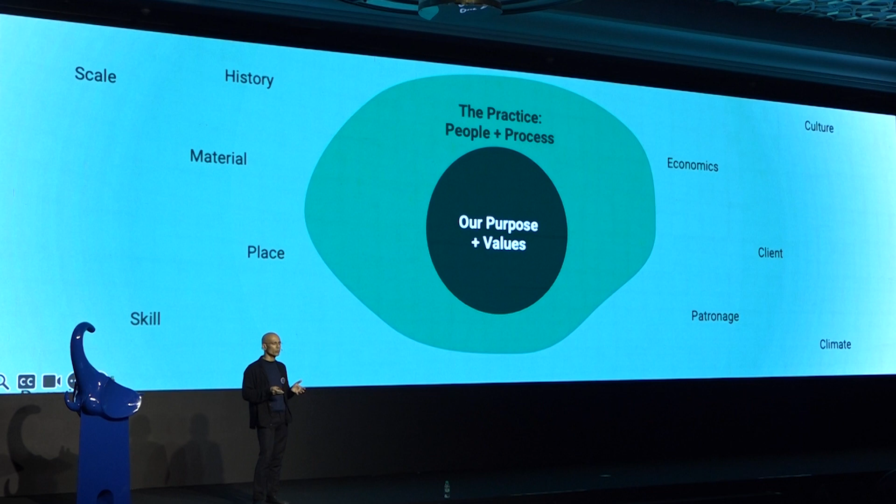But what I'd like to lean into today is the why and how of what we do. As our practice reshapes itself to changing external conditions, such as clients, budgets, and what have you, there is an underlying set of design values that we believe speaks to the changing needs of the vast diversity of India - guiding principles that address not only environmental concerns, but equally the sustainability of our social and cultural context.

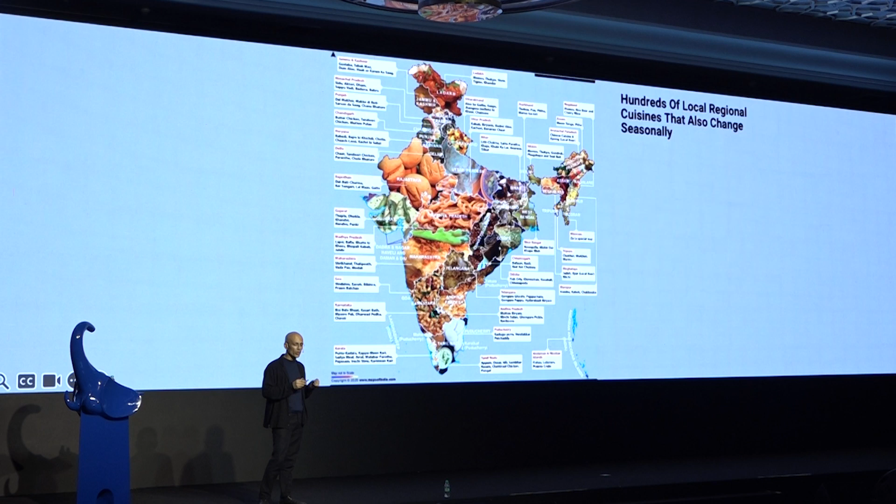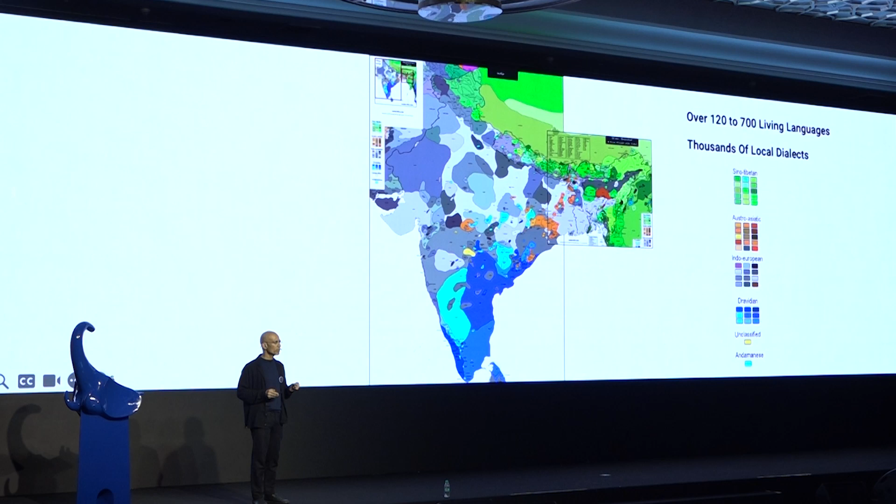Before I do that, I'd like to go a little deeper into understanding our country. We occupy only about 2.4% of the world's landmass and yet have more than half of the globe's climatic zones. What that means is we generate 21 agroecological regions within the country, which in turn creates amongst the most diverse regional cuisines in the world, based entirely on local and seasonal produce. We have over 2,000 documented craft forms still alive, even though a lot of them are rapidly dying. According to different sources, we have hundreds of living languages and thousands of dialects. In short, we are many countries in one.

But why is all this important? Our traditional lifestyles, a lot of which are still vibrant and alive, are based on strong regional response, where people live in harmony with their context - richly diverse cultures which are highly local, impacting language, food, clothing, and of course, building.

A few examples: such as this in Kerala on the southern coast, with its hot and humid climate, where people's clothing is as porous and ventilated as the buildings they inhabit. The food they eat promotes cooling in the body, and most of the population still lives comfortably without any air conditioning.

Or then here in the Himalayan desert of Ladakh, with its cold and dry climate, where the high thermal mass of the mud walls and small windows and the yak wool and fur clothing keeps people warm with very little artificial heating, while the salt butter tea keeps the skin supple and hydrated.

Or then the western hot and dry deserts of Kutch and Rajasthan, where straw bale roofs and adobe walls of the buildings, and layers of white hand-spun cotton on people, keeps the coolth in and the heat out, as the spicy food keeps the sweat glands active.

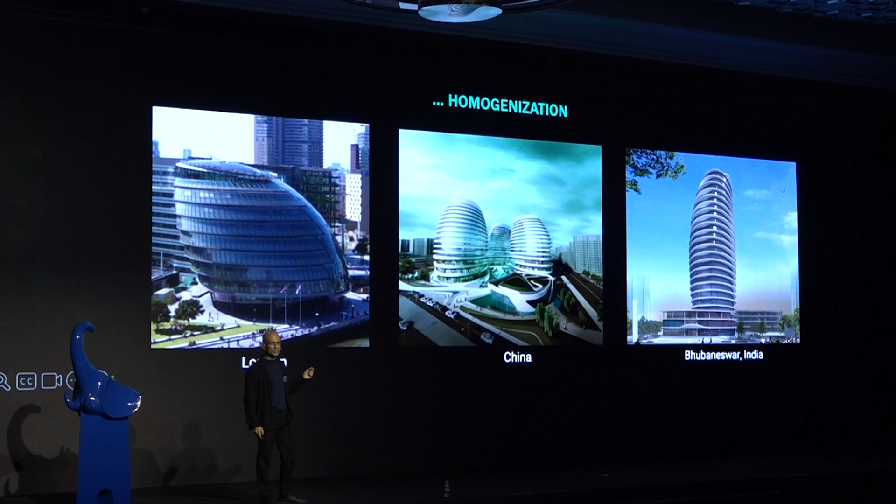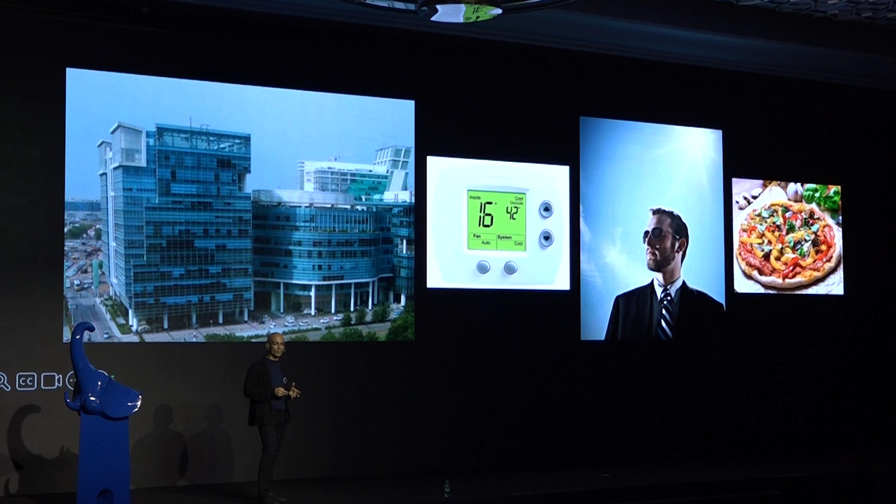In the past few decades, India is rapidly on the road to development, becoming globalized, causing a homogenization of our aspirations as the global south seeks to play catch-up with the global north - in our buildings, our food, our clothing, right down to the standards of comfort we aspire for, readily discarding indigenous wisdom imbibed over centuries. What then can we do differently?

Can we find ways to interpret the wisdom that surrounds us in a way that speaks to our collective futures? In our own small way, we have tried to do this through a set of values that have more emerged and shaped our work than been created over the past few years.

We have always been a country of frugal means of doing more with less. How do we build in a way that keeps the handmade relevant at increasingly larger scales? How do we keep our solutions forward-looking yet simple and passive for ease of access to a larger audience, looking beyond just preserving built historic structures and increasingly adapting ordinary structures for their embodied carbon? What does it take to do buildings that endure, not just in material and form, but in people's imagination, for the inherent meaning they embody?

A lot of our clients are hospitality and luxury brands. Can we reframe what luxury means using local materials and processes, and elevate these instead with a high degree of craftsmanship? Last but not the least, weave all of this together as a work of poetry that inspires us and those around us. I'm going to take you through a few examples of how we've attempted to address some of these questions.

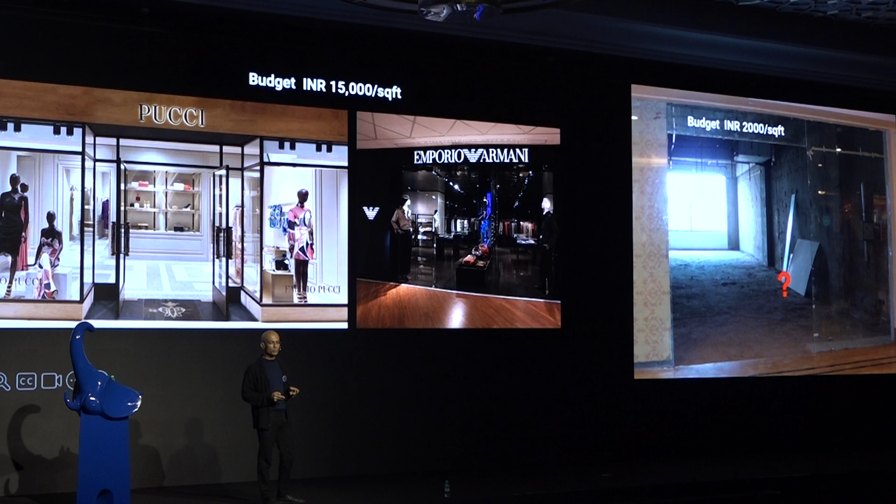One of our earliest projects 18 years ago was a small store for a leading Indian fashion designer at a luxury mall in New Delhi. This mall was the first home to the then new-to-India foreign luxury brands. These stores adjoining ours had budgets for interior fit-outs close to 10 times as much as what we were given, and we had only 2 months to design and execute the store.

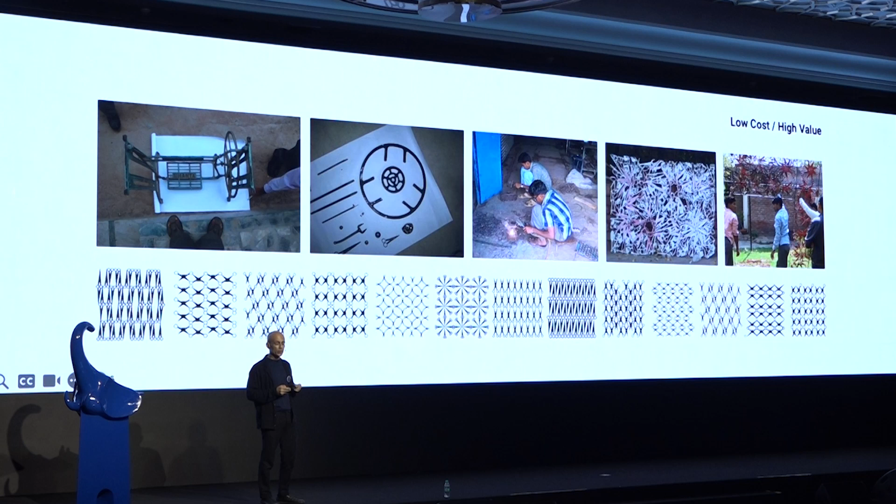We took inspiration from Rajesh's design approach of using handcrafted techniques to create texture on simple materials, and used a small team of ordinary welders, much like Rajesh uses his tailors, to create texture and pattern. They hand-welded 12,000 locally sourced scissors into 14 different patterns onto metal pipe frames made off-site, which were then assembled on-site and inserted into the whitewashed bare walls of the store. The air conditioning and electricals ran outside of this lattice cube.

The clothes were framed by this lace-like filigree. As you can see in the image on the right, the imperfections of the hand welding only added to the tactility of the space. Not only was the project delivered on time and budget, but also became a celebration of the client's brand philosophy using a frugal handmade approach.

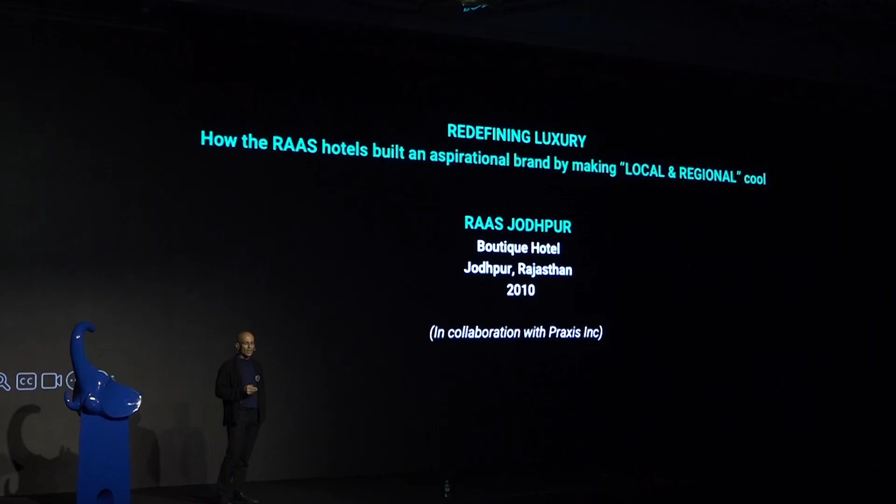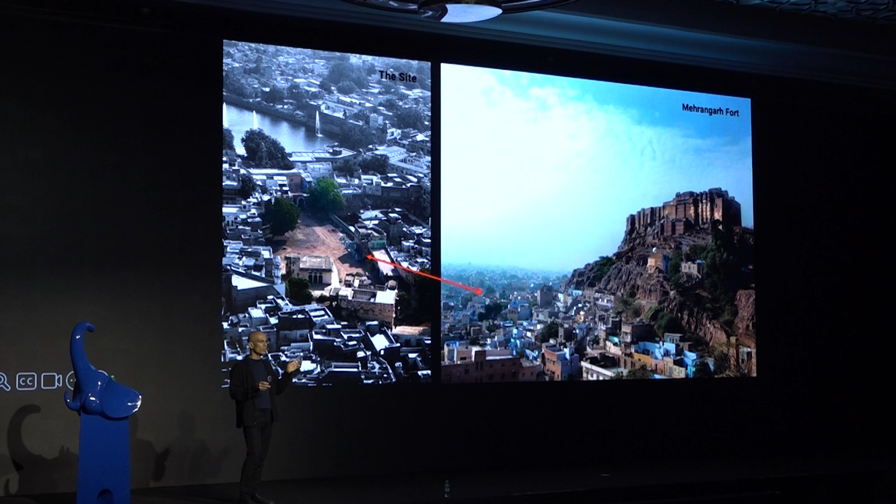We scaled this understanding to a different level when we had the opportunity of working for a client building a boutique hotel that later spread its reach across various parts of the country. The first of these was on a site in the walled city of Jodhpur in Rajasthan, on a 6,000 square meter plot with 3 derelict 17th century buildings on it, as you can see in the image on the left.

Access to the site was through narrow lanes inaccessible by construction trucks. The lanes brought us to this old gate, which opened onto a spectacular view. The 3 old buildings had been modified over time by multiple families living there, which had left them with very little semblance of the original architecture.

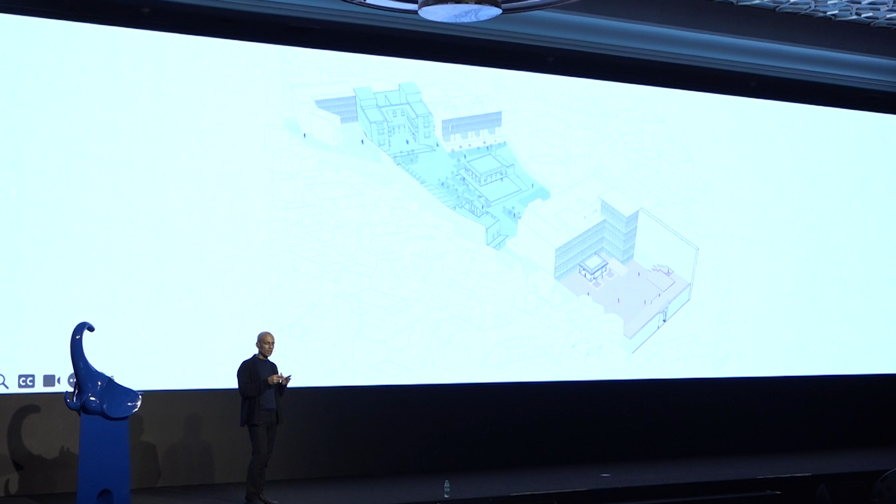The business plan demanded 40 guest rooms. Our site plan looked at restoring the 3 old buildings as anchors, housing the public spaces, the restaurant, pool, spa, and lounges, with the rooms built around them as 3 new structures.

Thus, the first block becomes the second gateway to the site after the main gate, and the rear 2 blocks become the canvas for the 3 historic buildings, all visually connected to the fort.

We identified in the old buildings what could be removed, peeling away layers of paint and cement, removing arbitrary interventions that had been made by the families living there over time, restoring traditional details in stone and lime mortar until the jewel-like forms of these historic buildings emerged from within and started reconnecting their shared history in conversation with the fort.

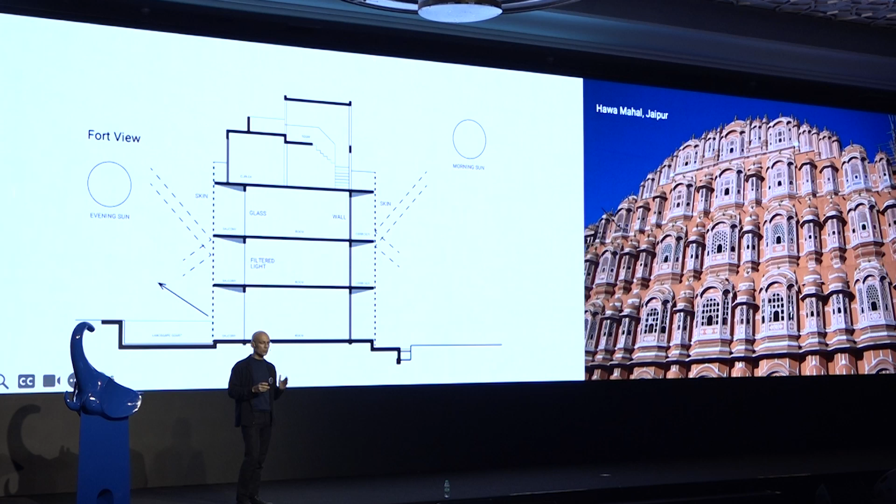The second, more challenging part was designing the new blocks using traditional materials but in a contemporary idiom. These buildings had to be west-facing because of their views to the fort. We designed them as double-skinned structures with naturally ventilated verandas and corridors, buffering the air-conditioned rooms from the heat like the traditional Jharokha structures of the region.

The fort-facing balcony had to have openable stone shutters, and we needed to limit the weight. They needed to be only 20 millimeters thick. We wanted to reference the traditional facade forms of the site using traditional patterns, but it wasn't possible to hand-cut these onto such thin stone without it cracking. The only way to do this would have been to use a water-jet CNC cutting machine.

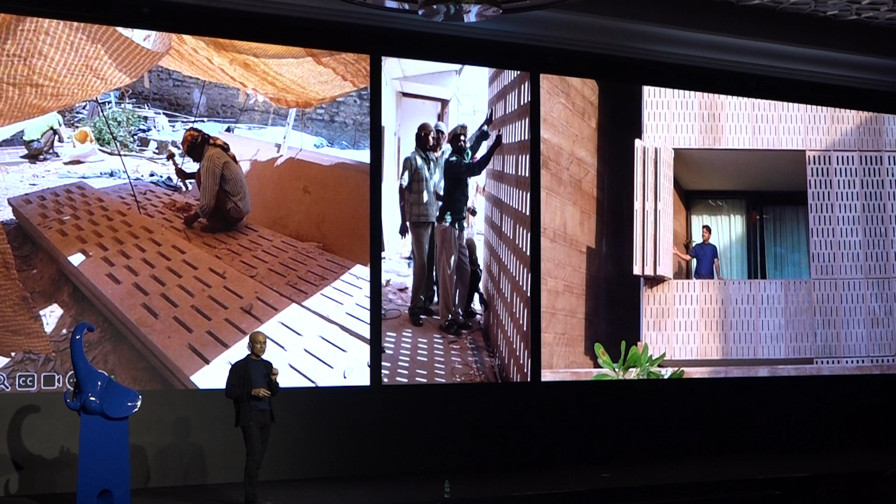However, we chose to stay authentic to the process and instead simplified the form to a simple graded perforation that could be hand-cut on these slabs, procured from a local quarry 10 kilometers away. The shutters you see in the video are fabricated by local welders and stonemasons. They weigh 420 kilos and continue to work smoothly 15 years later, operated by one person.

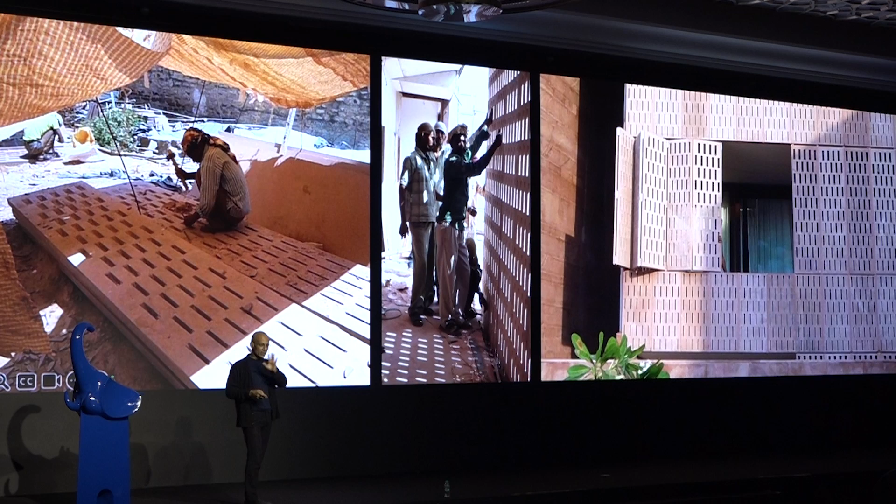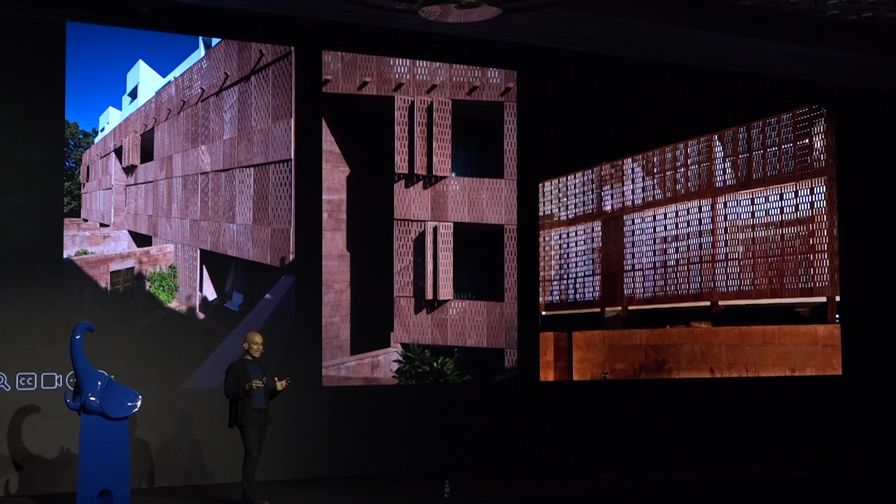These not only become part of the balconies, but also the naturally ventilated circulation spaces, negotiating privacy and transparency, infusing the new blocks with a changing quality of light and shadow cast by the sharp desert sun through different times of the day. As guests play with the facade, it changes through the day, and in the night, the stone filigree feels like fabric as the three new buildings become lanterns framing the site.

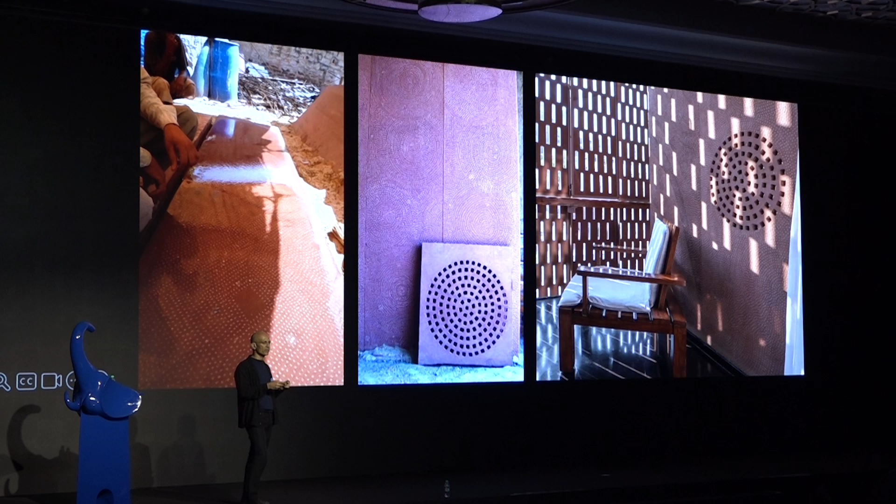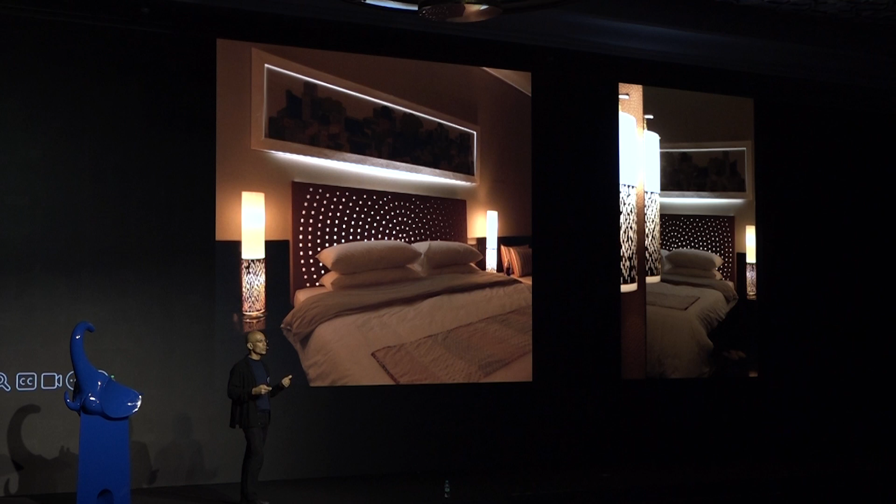To breathe life into the smooth quarry-cut sandstone slabs, we turned to the craftsmen at site and over multiple prototypes generated hand-chiseled patterns at site, which translated on the surface you see on the left, which are 50 millimeters thick, 3-meter high solid stone partitions that divide the bathroom from the room, as you can see in the image on the right, and on the solid stone hand-cut perforated headboards, which also serve as a nightlight.

The project works on creating a conscious dialogue between the old and the new, as it seeks to create a seamless experience of history and the present.

We realized that if we are truly to create something authentic that adds value to the project and all the stakeholders that work on it, then we need to go beyond the visual form and stay true to the value and the process we espouse.

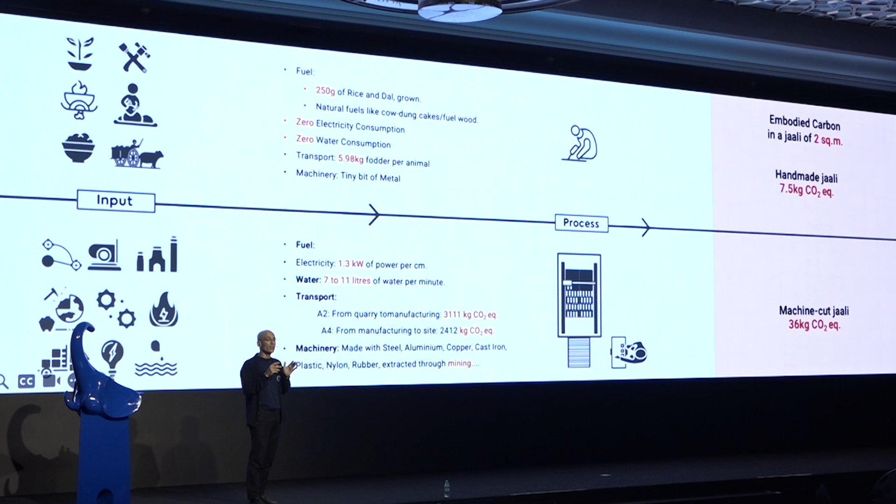A happy coincidence when we started rationalizing our work much later, we found that aside from the value it added to the stonemason's craft, and of course the organic feeling that the handmade can give, the embodied carbon in this is nearly one-fifth as much as a panel done by a water-jet cut machine.

Another key learning for us was that to tap into this hidden potential, we needed to move beyond the comfort of our drawing boards and computers, trust the process and the wisdom of artisans and other stakeholders at site, and engage with them to co-author the final outcome.

I'll take you now to a totally different context for the same client to build a 40-room hotel near Dharamshala, way up north, the home of the Dalai Lama, a project that's still under construction, with spectacular views of the Dhauladhars to the north and the tea-growing valley to the south.

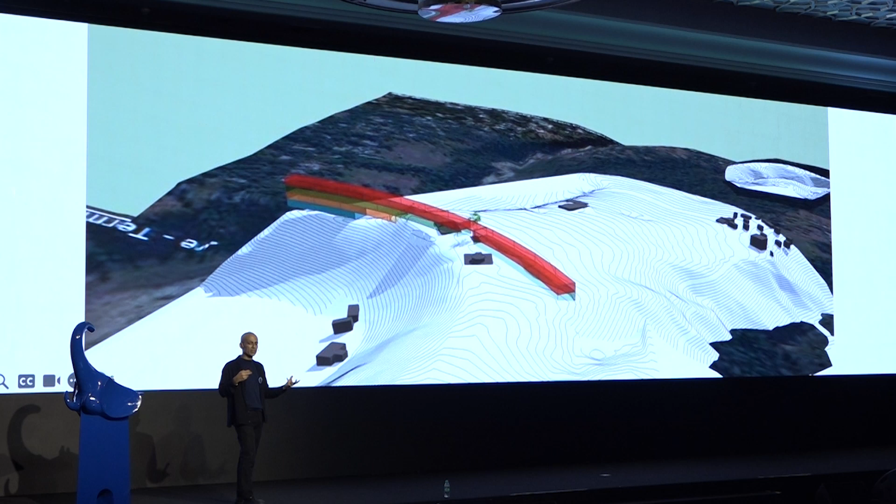The architecture here takes a totally different form while celebrating the brand's values. So we moved away from the idea—this was meant to be a resort—and we moved away from the idea of multiple cottages, which fragments the guest experience, and also increases infrastructure, energy, and creates servicing and circulation challenges.

We instead extruded the section of one cottage across the contour of the entire hill to create a single 220-meter long building, which was two-storied with 40 suites.

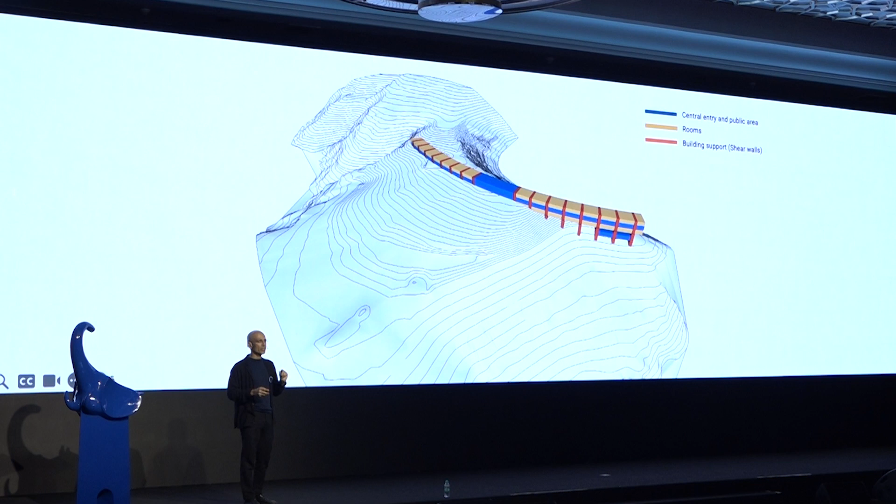So the red vertical spines that you see here are individual staircases that lead to the suites, which are the yellow band above and below the blue band, which is at the ground level, which houses all the public amenities such as the kitchens, restaurants, and spa.

This way, the rooms have no corridor on either side and have private balconies on both sides to enjoy uninterrupted views of the mountains on the north and the valley on the south. And while you're in the room, you see no built structure.

The building is inspired and formed by the powerful yet silent rhythm of a Buddhist monastery, and the materiality is derived from the local village homes and temples of the region.

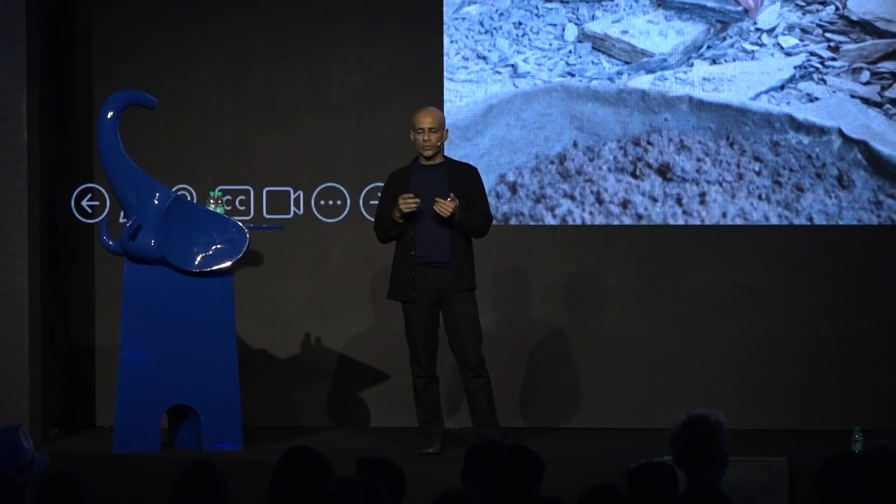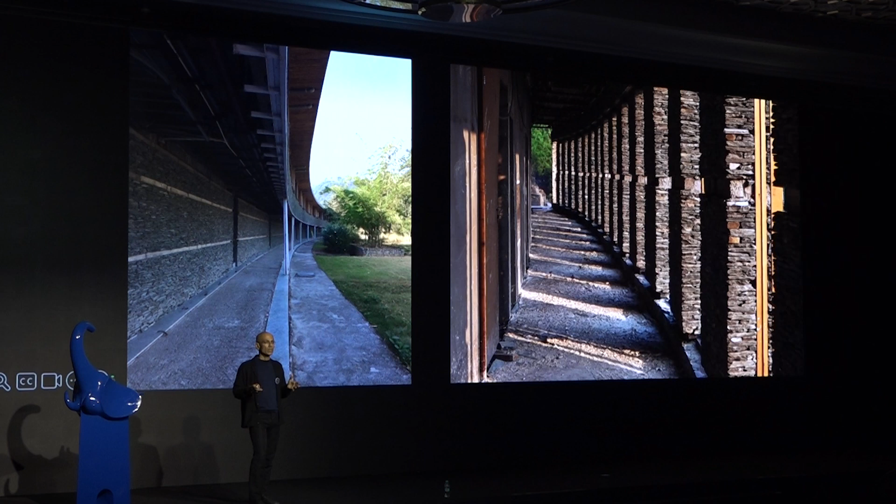We used waste slate from local quarries that villagers usually build their boundary walls with. We were able to elevate this humble material into a luxurious expression with the same group of masons who had worked with us in Rajasthan, who came over, collaborated with local Himachali masons to build this sweeping form, which is over 200 meters in length with its thick masonry walls that give the building thermal mass for the solar-powered underfloor radiant heating, and also gives it its timeless expression that captures the rhythm and the materiality that we sought to express.

This is a view of the building as it peels away from the sloping hills and sits against the mountains. Here again, engaging deeply with the site and local material and skill spoke to our aspiration of giving a timeless expression that situates itself somewhere between the contemporary and the vernacular.

The third hotel for the same client, again in a different context, between Jodhpur and Jaipur in Rajasthan, on an 800-acre rewilded private forest with a 200-year-old rainwater check dam on which the original owners used to run a 12-tented property, which was seasonal only for the winter. Business became unviable, and our RAAS clients entered into a JV with the family and converted it into a perennial property.

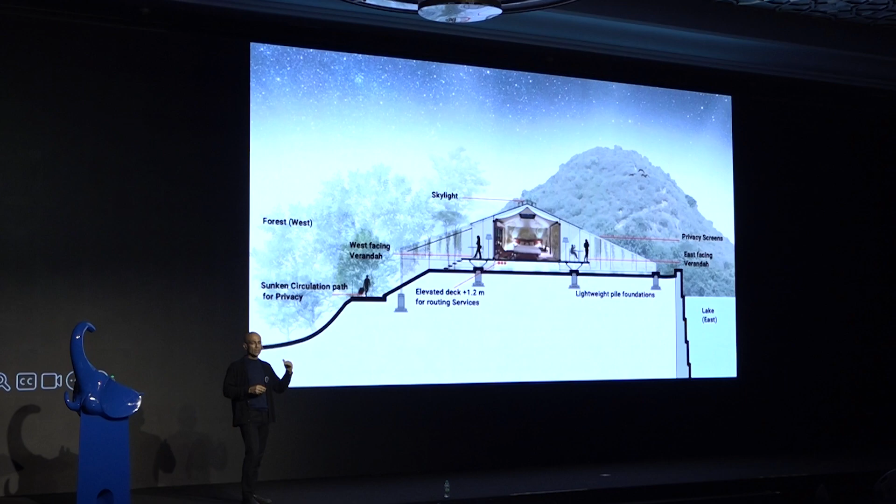The section shows how we sunk the guest circulation below the west side of the dam so that guests had uninterrupted private verandas towards both the lake facing sunrise and forest facing sunsets. Due to the fragile nature of the 200-year-old dam, we needed to create a building that was almost as light as the original tents and used almost no concrete.

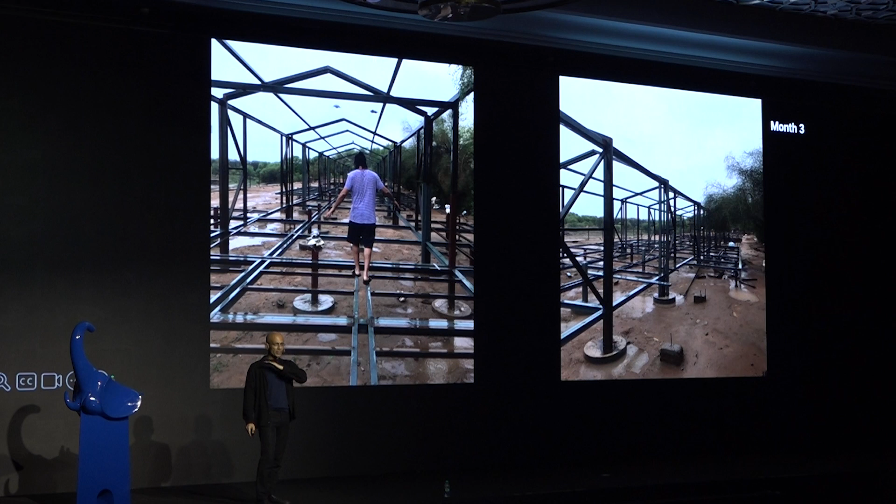We had only 8 months to build out the project and designed a light foundation system of precast hume pipes filled with stone and lime mortar, mounted on a lightweight framework for all the tents, which allowed us to run all the engineering services floating below the elevated floor, and did not need to dig the very sensitive topsoil of the dam.

The roof is a double-layered waterproof heat-reflecting canvas skin that creates shaded overhangs on either side. That is the sunken path to approach the rooms. You move up and enter the tent as the lake gets revealed, taking forward the idea of unfolding thresholds from the previous properties.

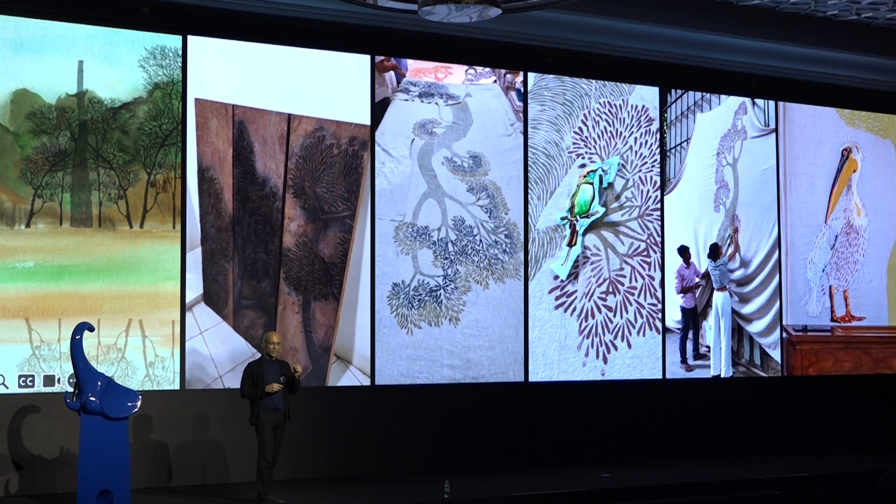For the tent-inspired textile interior, we worked with printmaker Dhwani Behel from Delhi, who spent weeks on site sketching the flora and fauna of the region and innovated on the block printing craft of the region by interpreting her sketches onto these really large 6 to 8 feet tall wooden blocks, which she hand-printed the linen for the tents with. These were further hand-embroidered with migratory birds and animals that come to the site.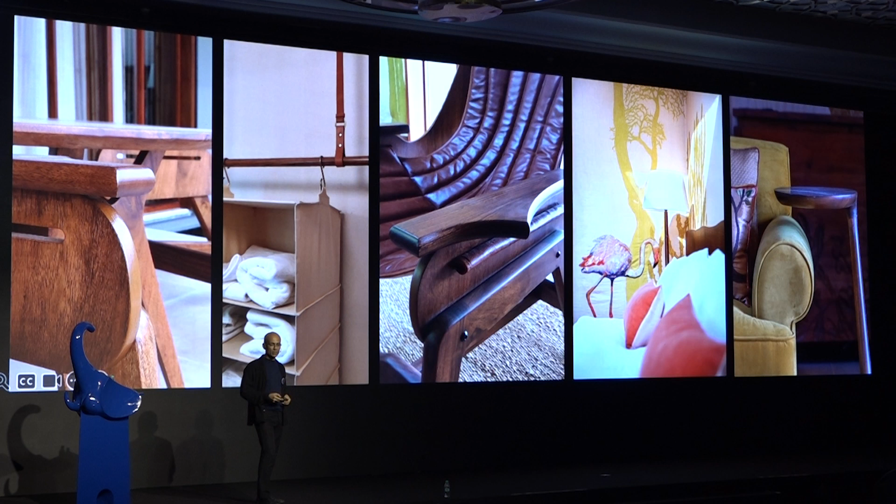We then took the same narrative into the furniture, such as the hand-carved casings for the air conditioning units on the floor, and custom designed the camp-style furniture in native kikar wood, all of which come together as happy surprises of varying compositions.

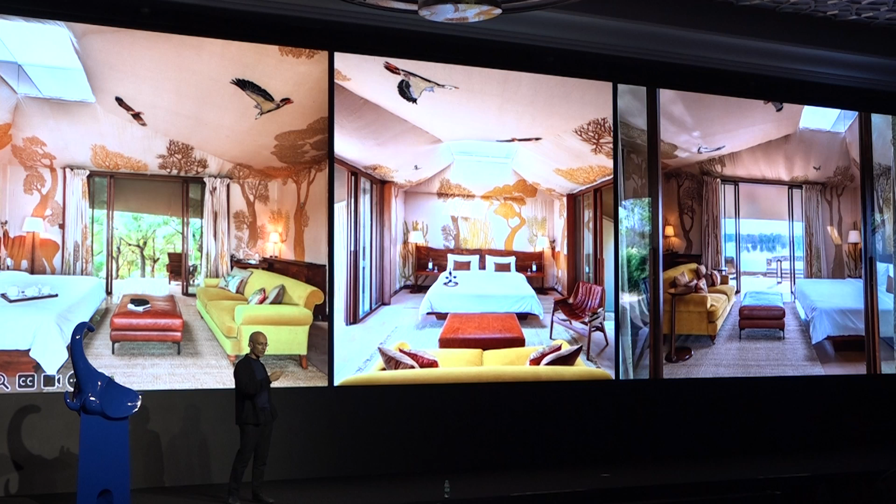On the left image, a private sit-out towards the forest, which is where you enter from. In the middle, a skylight that lets in winter sun and frames the brilliant night sky over the bed. To the right, doors that open to your private veranda on the lake, from where you can step down into a private garden. As you move onto the lake in a boat, you see the building lightly perched on the dam, and towards the far right, the reception, bar, and restaurant.

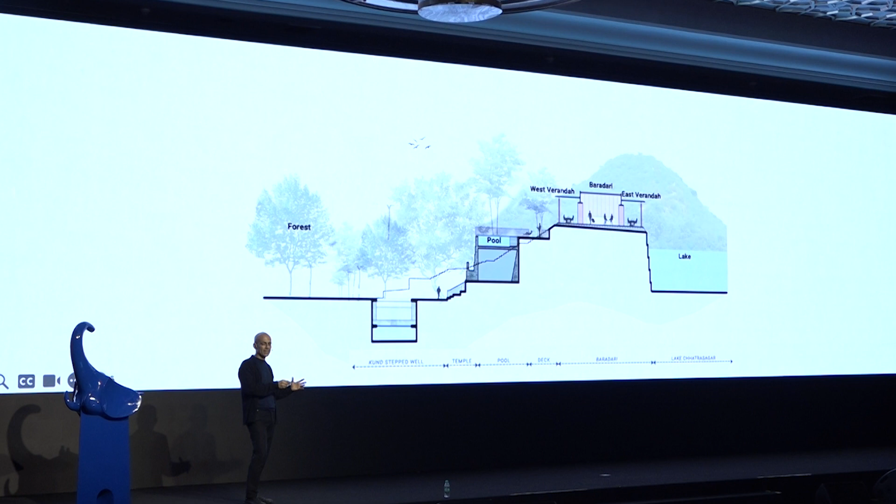This is inspired by the traditional pavilions of the region as a singular building, lightly perched off the dam again, with a wraparound deep veranda that overlooks the pool on the sunken side of the dam, which cascades down into a restored stepwell, which is also the entry plaza.

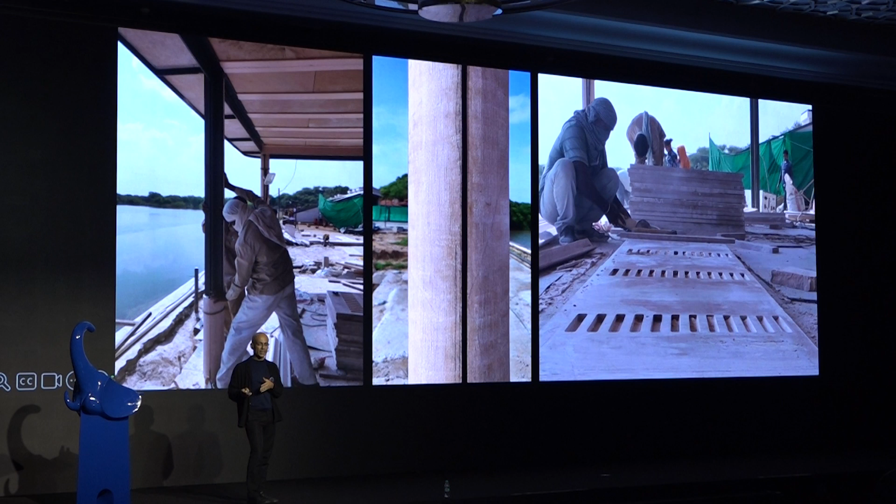The construction system here uses no concrete, it is a composite of hand-carved regional sandstone clamped onto steel frameworks, and where people touch the stone, it has a hand-chiseled texture. To the right, we can see the air conditioning grills being hand-cut at site.

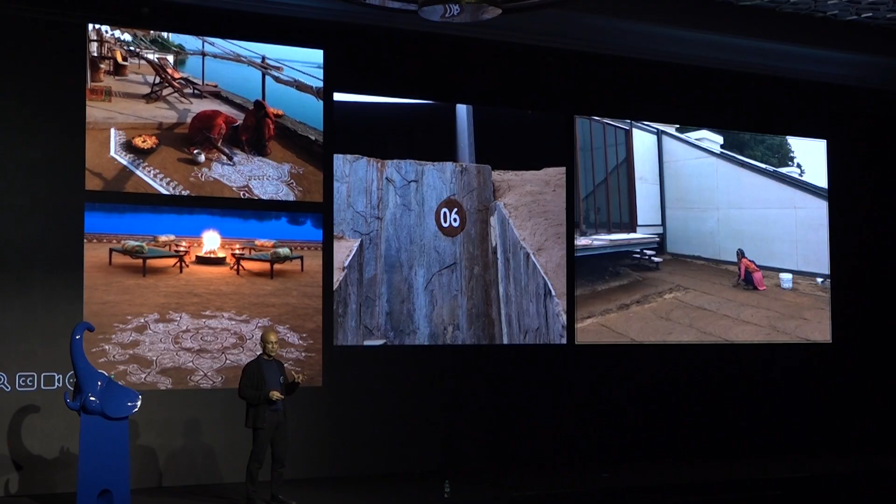Together with the owners, we found a way to keep the women from the neighboring villages actively engaged in the upkeep of the decor through traditional decorations in the landscape, inserts with mud and lime, such as these hand-painted rangoli patterns on the courtyards, and even the numbering of the rooms, all of which needs to get redone every few weeks. This is a video capturing the experience of being at the hotel.

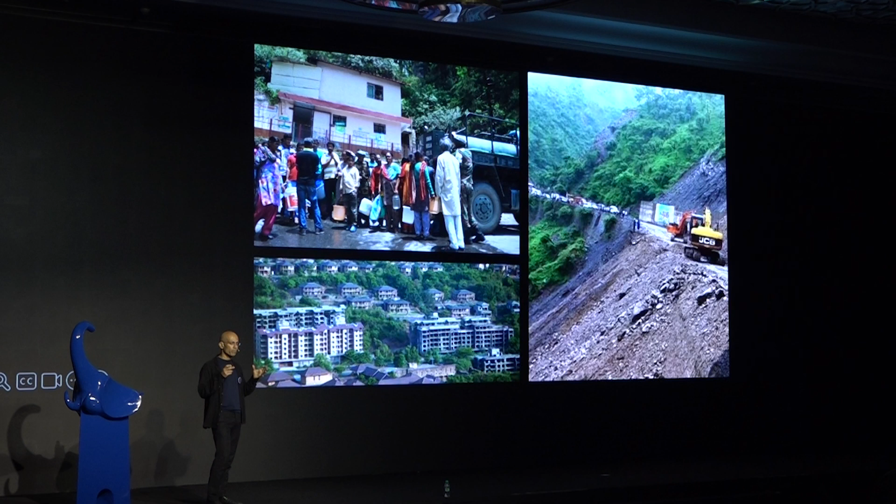The biggest problem in these hills, as some of you might know, is the impact of rampant, unplanned construction and torrential rain, causing severe erosion and landslides. And in spite of the heavy rain, ironically, there's a scarcity of water for human consumption, much like in Goa.

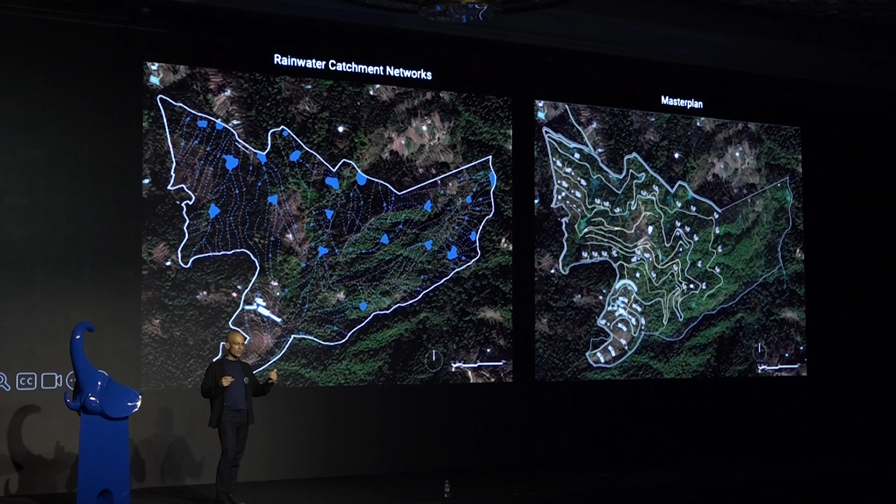Together with landscape architect Akshay Kaul, we developed an ecology-first master plan, mapping natural rainwater runoffs and green belts, around which we developed the road networks and the location for the built structures.

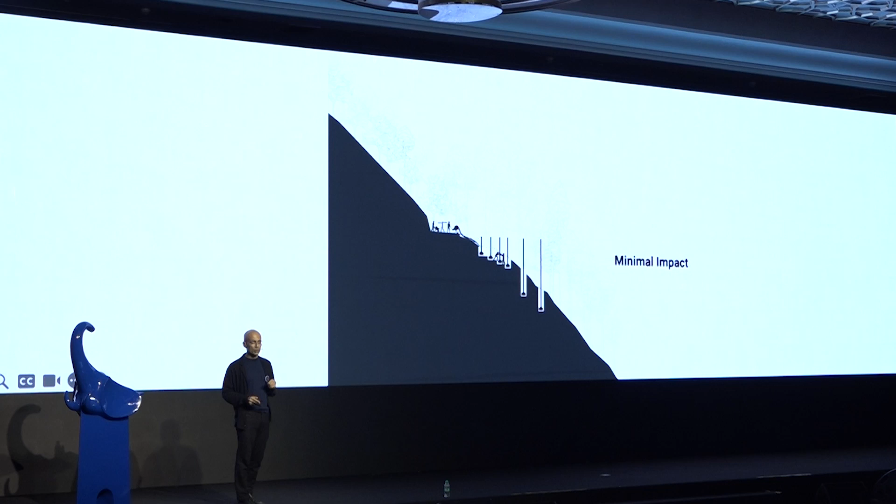Together with structural engineer Manjunath, we have managed to build in areas which are non-productive, on slopes, virtually impossible to build in traditional methods, through a construction technique with almost no cut and fill, with minimal alteration of the slope of the hill. To ensure the surrounding trees do not get damaged, we developed a low-impact method which did not need cranes or heavy machinery to move the structural system.

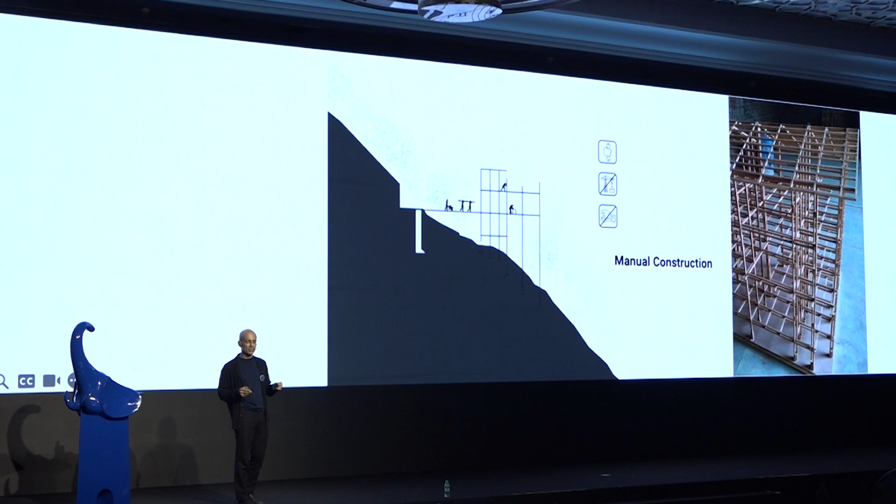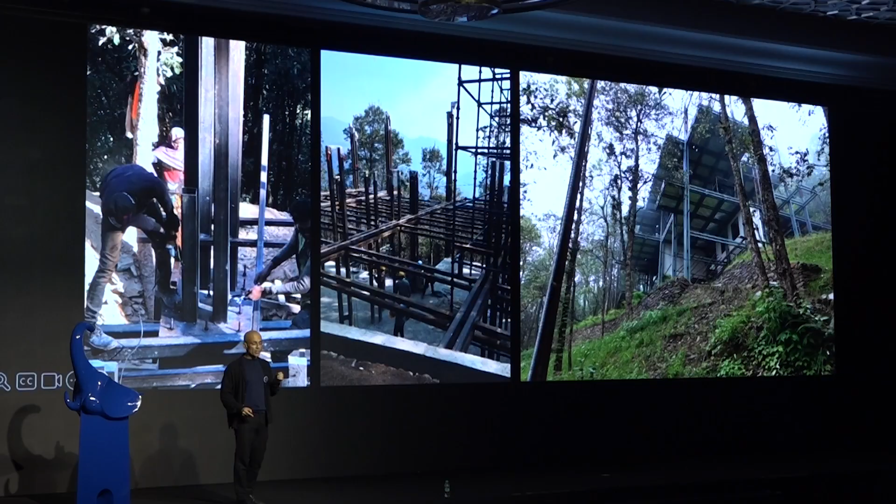By using a very strong basket-like weave of only 4-inch by 4-inch square steel pipes, each assembled part is less than 100 kilos, enabling 3 to 4 people to build the structure by hand without the need for heavy equipment. The structure could be erected rapidly with the trees around all intact.

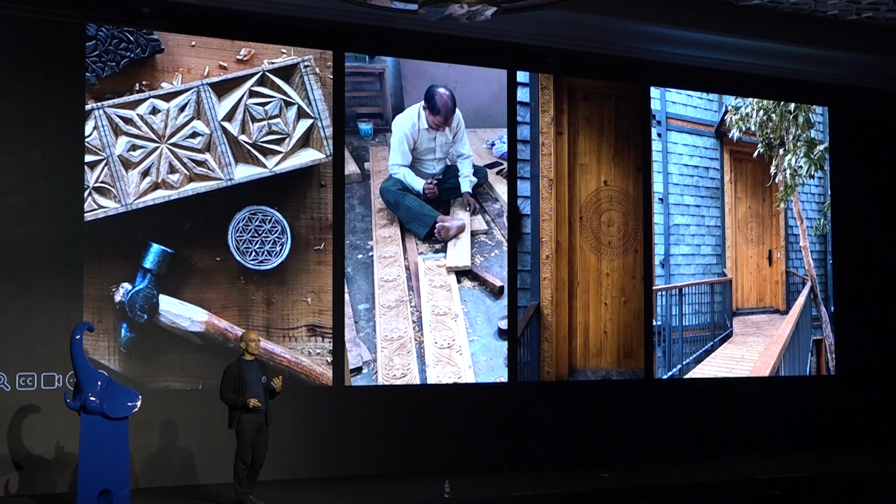Timber and slate form the facade rain screens. You can see that the weave of this thin structure is expressed as the walls slice through. Hand-carved details in timber welcome you into the house. The outside and the inside connect strongly, both in connections with the courtyards and the way balconies perch out into the trees. The house is encapsulated within the trees as it disappears into the forest, which was our primary intent.

So, coming back to Rajasthan... thank you.

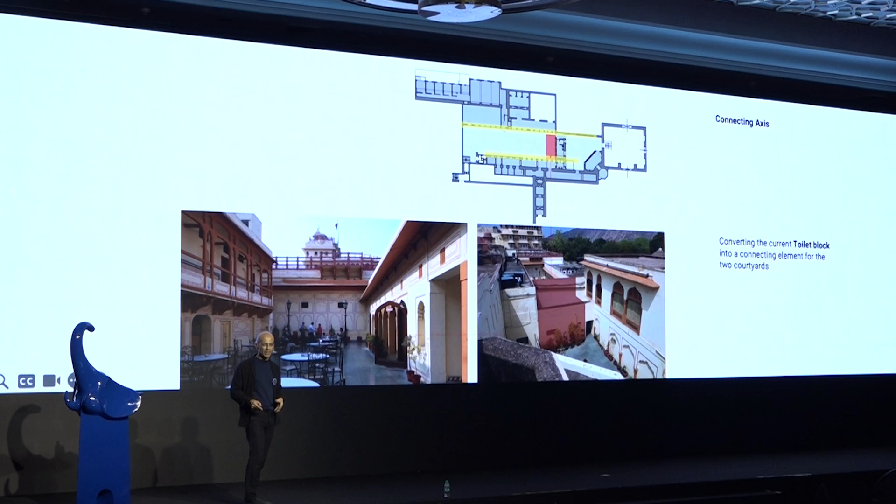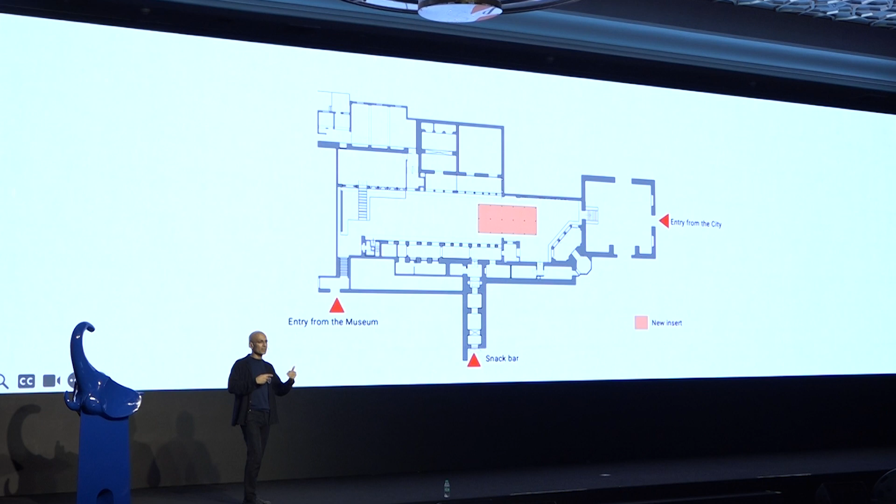To a more historic site, this is the City Palace of Jaipur, where we were invited to do a small cafeteria within the precinct of the City Palace Museum. We proposed re-articulating the central courtyard by replacing a vestigial toilet block that had been built a couple of decades ago with a new connecting pavilion, which opened up a new entrance to the city so that the cafe becomes the connector for the palace to the city after museum closing hours as well.

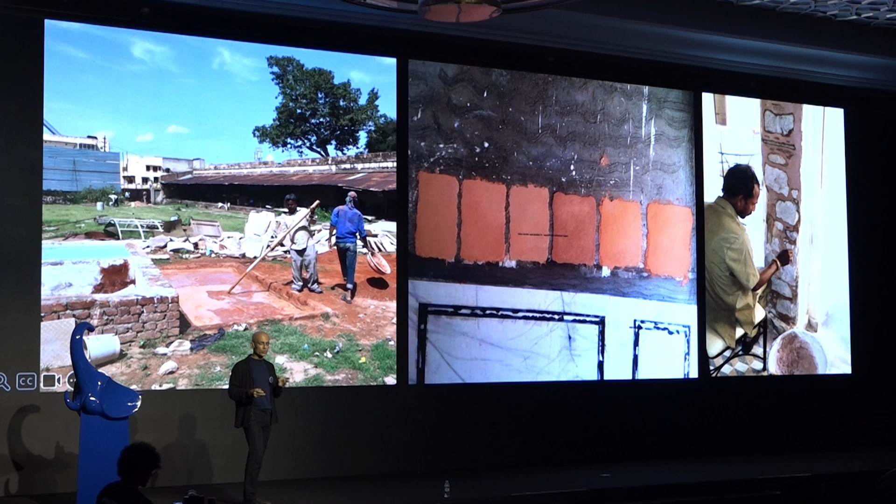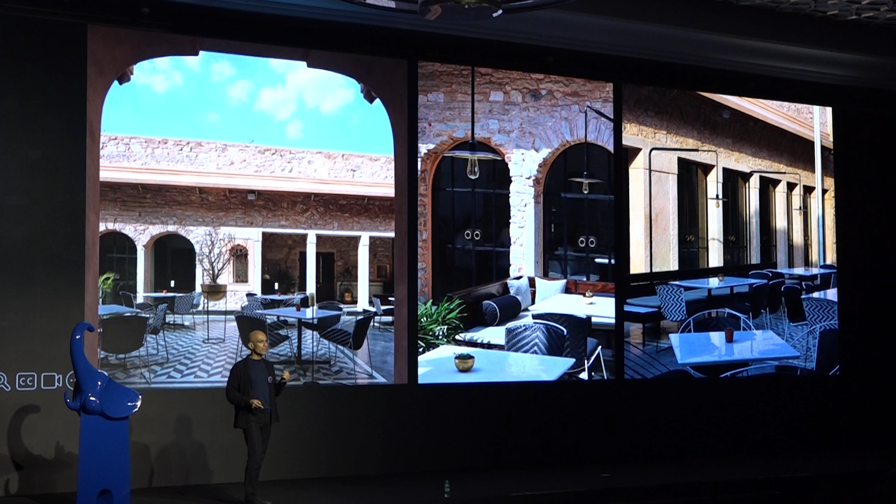We began to strip layers of cement plaster, so this seems to be a recurring theme, and paint from earlier, very poorly done renovations, to reveal the spectacular stone masonry beneath, which we repaired using lime mortar from pits we set up at site. Delightful transformations came about, as these before and after pictures show, and the buildings started to speak of their history through their material heritage.

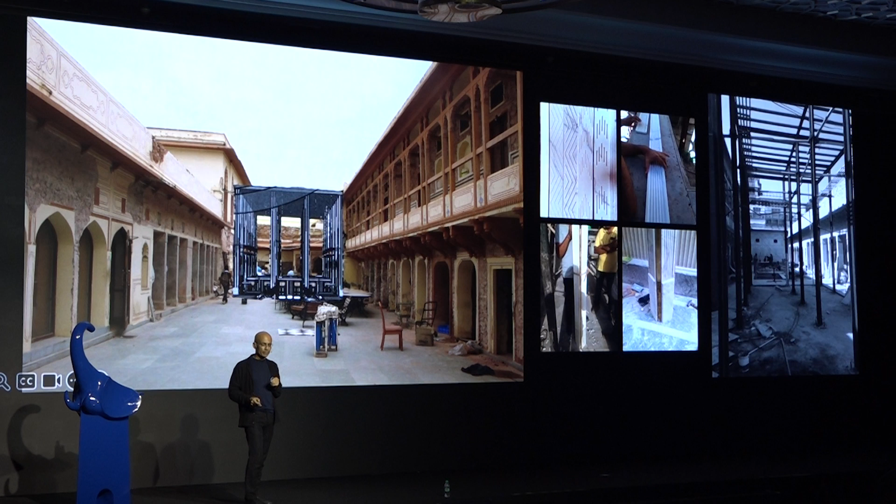We conceptualized a contemporary pavilion as an island that anchored the two courtyards. This also housed the bar, crafted out of a lightweight metal frame and handcrafted local marble, honed down to a fine thickness which made it translucent. It's not normally a translucent material, and it creates a dialogue between, again, the old and the new proportions.

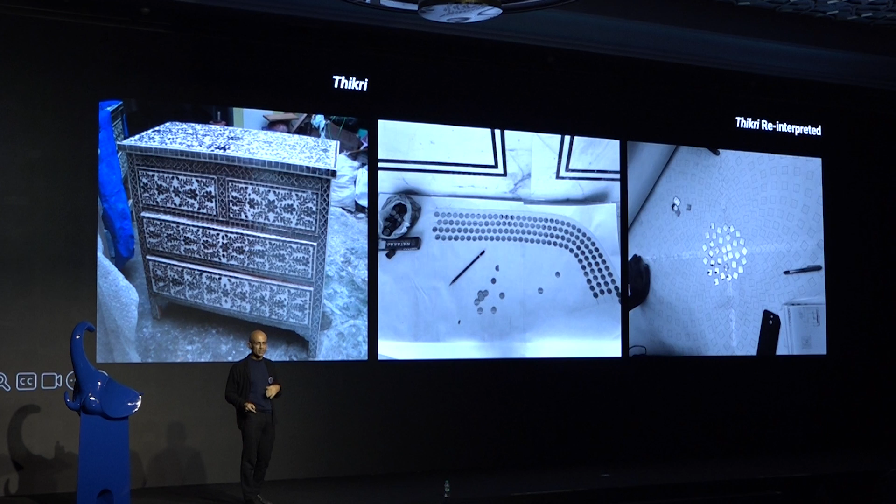Other craft forms, such as traditional hand-cut Thikri mirror work, which is used extensively in old furniture and sometimes on ceilings and palaces, was reinterpreted into new, more graphic forms that find place through different zones of the project. Different weave patterns based on textiles of the region find their place on furniture, which all come together as a tapestry of texture and light. And this gives the city a new watering hole that looks to the future while celebrating its past.

Thank you. We addressed a very different concern in the same city when Sunita Shekhawat asked us to build her a Haveli for her eponymous brand of enamel jewelry.

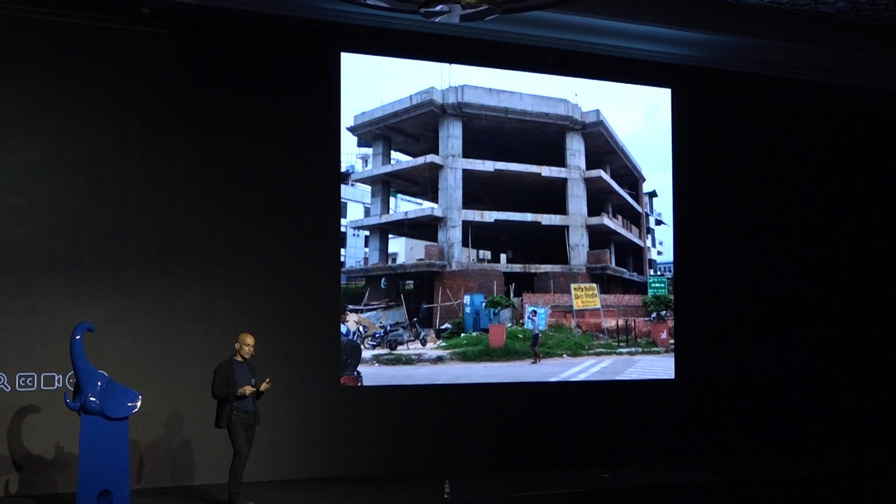There was already a structure on site which she had recently built, which she hated, and wanted us to bring down and build a new building. The concrete structure was in really good shape, it was brand new. And even though we would have had more freedom and a much greater fee in building anew, we chose to look at whether we could do something by repurposing the existing structure. In the process, we avoided emissions of more than 500,000 kilos of embodied carbon.

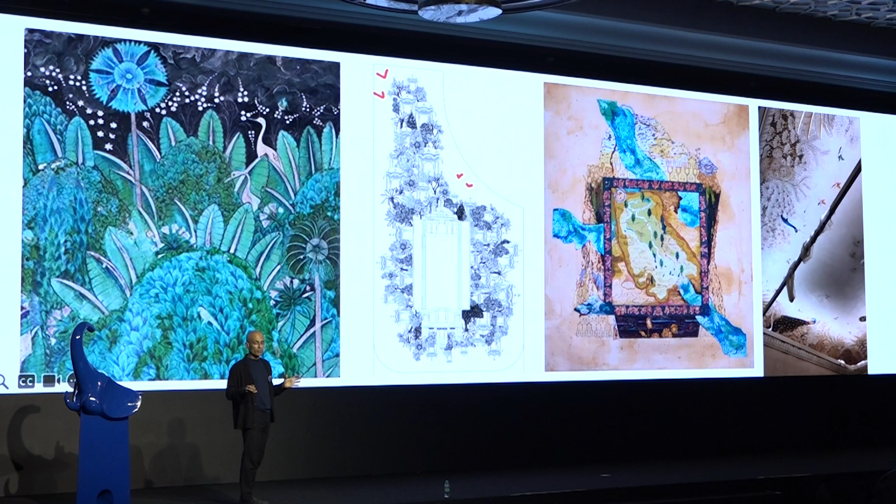The multiple retail zones are defined by frescoes done on the ceilings, but these are painted by miniature artists who usually work on an A4 sheet of paper. Finally, there's something I can connect with. It took several months of prototyping for them to start working on the scale and form that they were totally unfamiliar with. A lot of failures, and they managed to create spectacular hand-painted narratives which are inspired. Thank you.

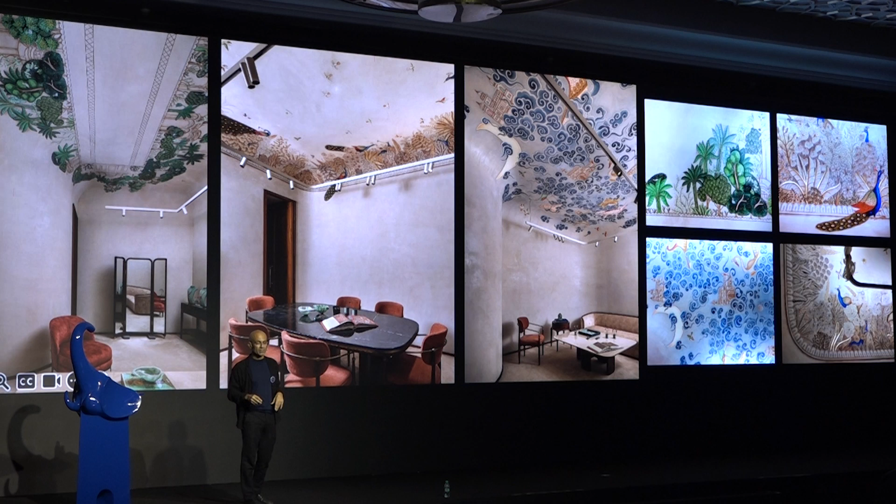These are inspired by the gardens of the region. They were painted on scaffolding by artists who had never done this before, so they're not fresco painters. These populate the multiple zones as you meander through the store.

The project becomes a contemporary handmade symbol for both the brand and the city. The sustainability story isn't even told, but it's embedded and embodied within the approach, much like what Rajesh spoke about with his forest. So we took this idea of circularity, of reuse, into a new building.

We began to explore something that could be reshaped as per emerging needs, because that's what was required for the project: a new visitor center at the Mehrangarh Fort in Jodhpur. We won a competition a few years ago, and this is being built as we speak. It should be ready in about 3 months.

It is, for most part, a naturally ventilated pavilion which stilts off the rocky hill so it doesn't alter the natural terrain. This is a grid of slender metal and full-size, 3-meter-high sandstone slabs, which allow the building to be reconfigured with changing use.

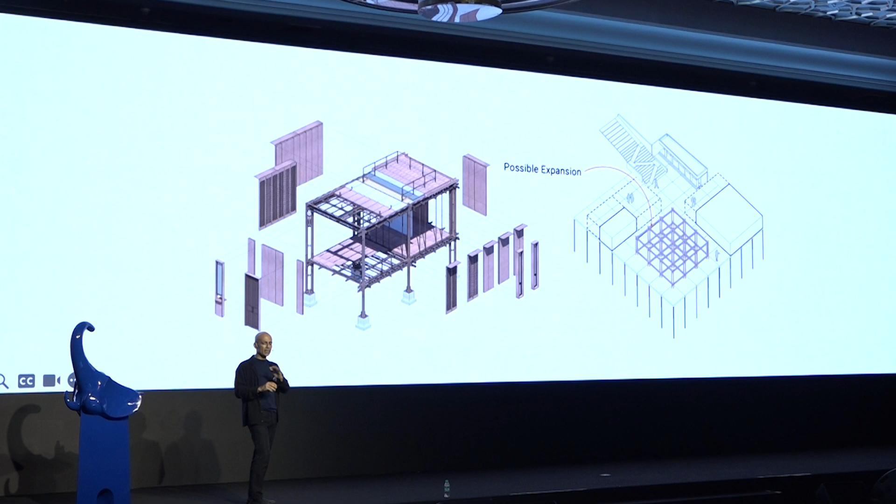The construction does not use any glue, mortar, or cement. The slabs are interlocked and pinned onto the superstructure, and aside from the waterproofing membrane on top, the building can be disassembled and reused as a modular system. It's designed to last 50, 100 years, so it's not a temporary structure. In fact, over the course of the project, over the last 2 years, it has undergone 3 variations as the needs of the program changed.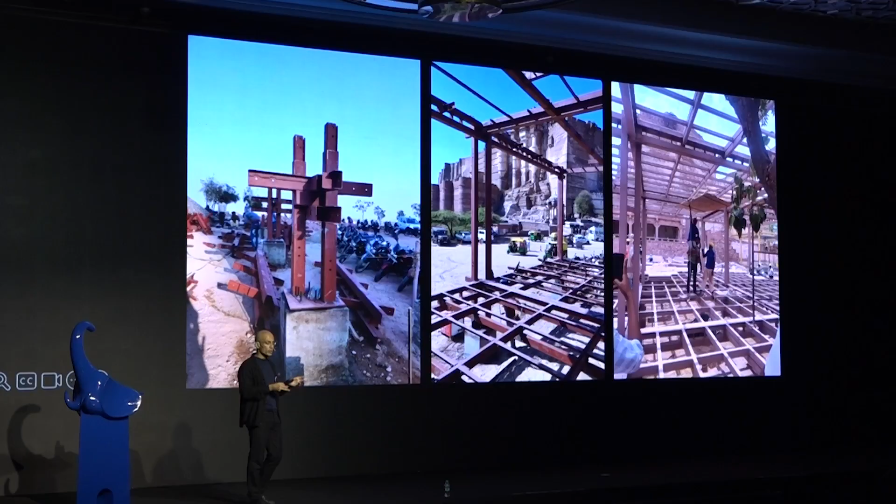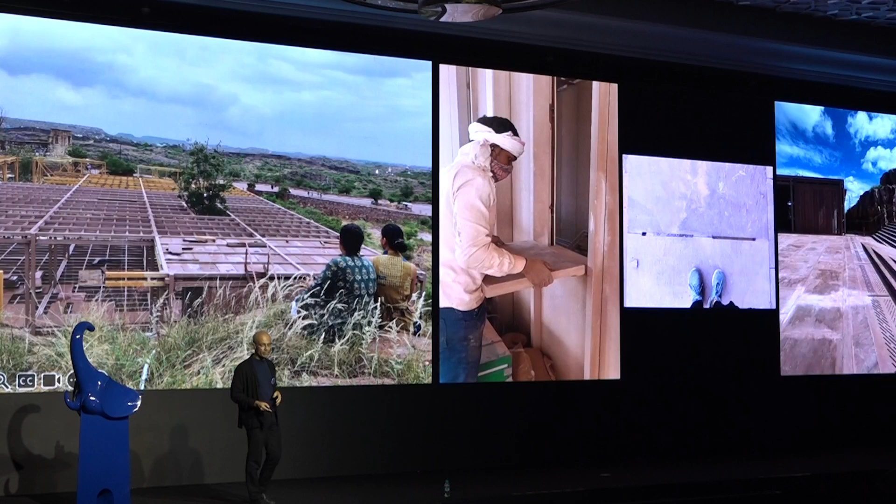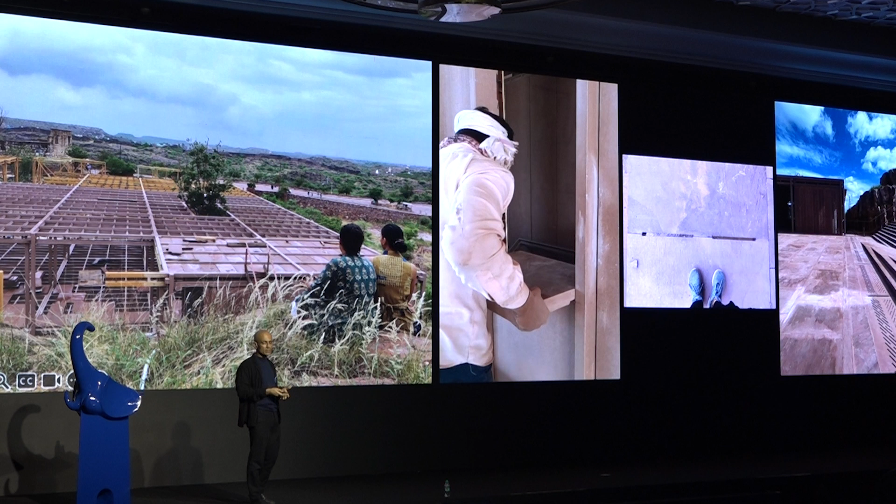This modular steel structure is designed to take in stone panels that slide in, 10 feet tall, 2 inches thick, sometimes insulated double-skinned walls, sometimes brise-soleil screens that create a porous, ventilated space. There are interlocking shelves and window lintels that slide in as a system of components which can be disassembled if needed. The flooring consists of perforated stone slabs slotted to allow rain to flow through into the hillside.

The project is perhaps a prototype which appropriates engineering and craft as a synergetic whole, and proposes a system rooted in the region, yet creates solutions that are circular, frugal, and forward-looking.

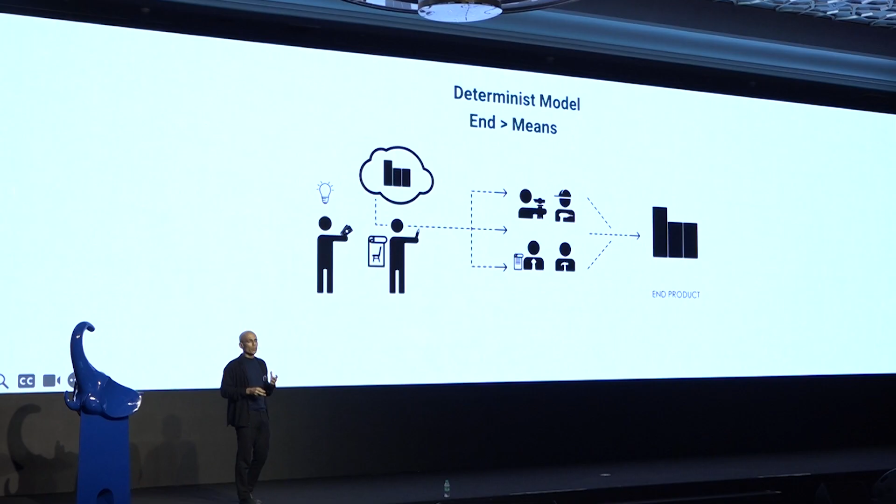Over time, our work has taught us to move away from a classical determinist model where the architect or designer is the author and directs everyone to follow their instructions to the last detail. We found this allows lesser degrees of freedom for other stakeholders to contribute their slice of genius, compared to a participatory model that's slightly more emergent, allowing multiple stakeholders to shape the final outcome, often producing a much richer product.

This process needs our drawings and approach to be flexible enough to allow for ongoing improvement or contribution at each stage of the project, something that's pretty difficult but immensely rewarding. So what becomes important is not the design vision of one person, but a process that can engage and empower people deeply at each stage.

This is something we've tried to bring into the organizational design of our studio over time. We realized early on that design driven primarily by principals or partners has limitations of excluding others, and looked at processes of collaboration which initially included other team members and clients. Over time, we've begun thinking of the studio as something alive beyond the walls of the office, as our values get shared and seeded in different stakeholders who become our partners in thought.

For instance, we work extensively with our studio alumni as an extended network—I think a couple of them are here—our consultants, contractors, artisans, and vendors, all of whom become participants in these shared values and process. The more boundaries we remove, the greater the innovation we are able to harness and include.

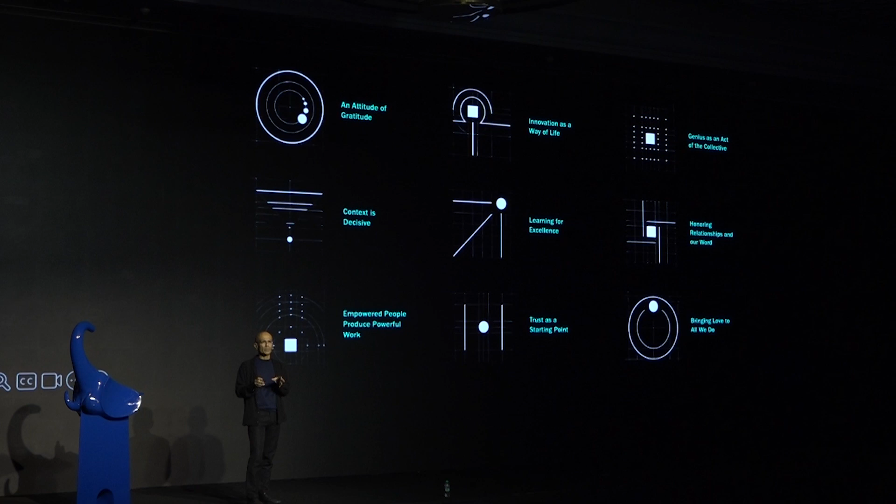Creating common ways of working becomes critical, and we've articulated a set of internal principles that guide us as a team, more behavioral and at the level of being. There's a glue that binds all of us at each step. Each of these has been defined in some detail—I think they're on our website—but I'll give you a couple of examples.

For instance, trust as a starting point is critical for success. We believe each person will strive to do their best if given the opportunity to do so. Our focus is on creating the right conditions for this to happen within the studio and the project. You can only do that when you view the people you work with not as a means to achieve your vision, but as contributors to the vision.

This has become a cornerstone for us, where we attempt to harness the genius of all the people who form this extended team.

To illustrate these in action more clearly, I want to share one last project, where we had the opportunity to design offices for the Department of Agriculture, for the state government of Orissa, which included a farmers' learning center. We suggested to the clients that we open up this facility to the citizens of Bhubaneswar, because it was in a beautiful part of the city.

And we did so by lifting all the offices up and freeing up the ground plane to create a free-flow space at the stilt level that connects to the street. Here you can see the top 3 floors, which are offices, and the ground plane opens up to the street with shared amenities, a library, auditorium, training rooms, cafeteria, gallery, and gardens, which can be used for events and workshops, and for people to wander through well after the offices on top close.

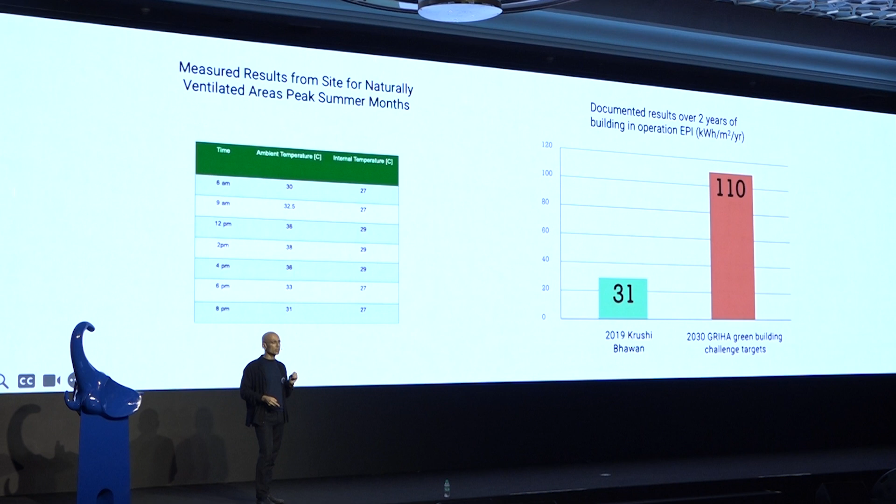Post-occupancy analysis has shown success in peak conditions to meet user comfort. Most importantly, the building consumes one-third the energy consumption of the green building performance targets for the year 2030, and a fraction of current green rating standards for office buildings. Here you can see, thank you.

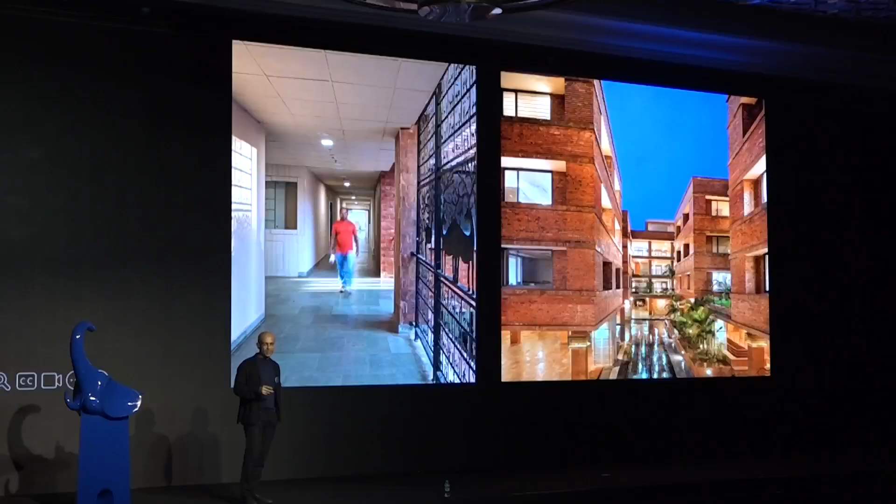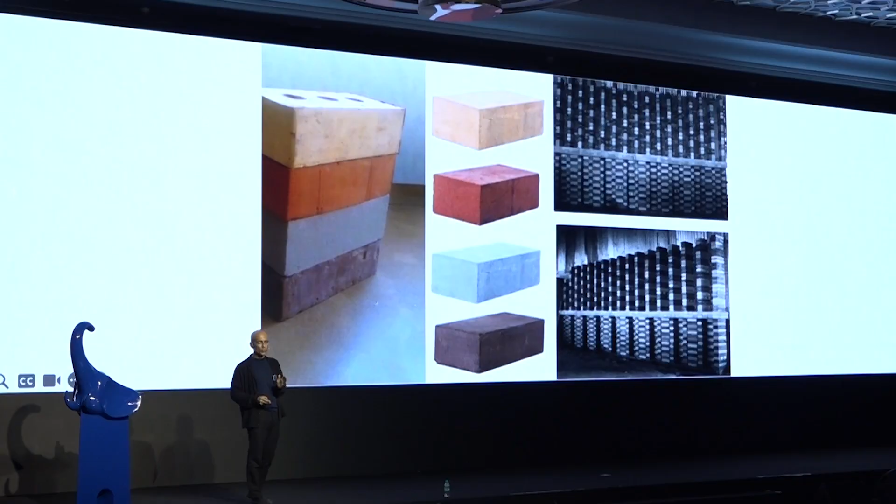You can see the naturally ventilated corridors and buildings with this courtyard morphology, nothing new, timeless. The layer of identity was critical as this building was a symbol for the new Orissa. Orissa is an agricultural state, and we derived our inspiration from the textile crafts of the region. We used 4 colors of brick, representing different colors of soil of the state, as solar louvers which shade the glazing of the building, creating a graphic expression that celebrates the region, moving away from the usual aspiration for a contemporary building through steel and glass.

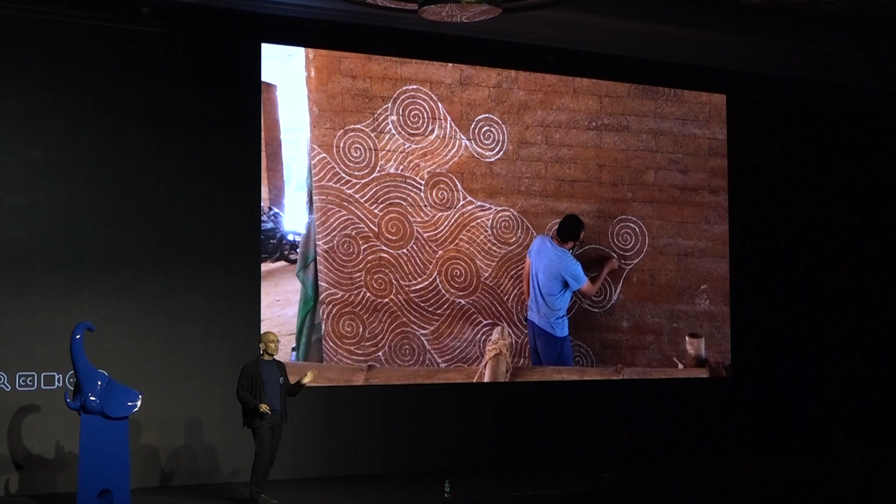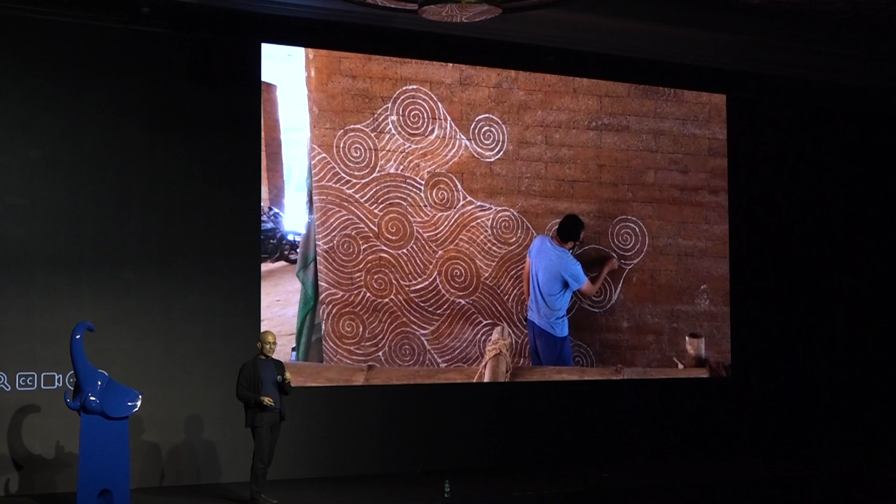We convinced the government to give patronage to a body of regional skills and crafts at a much larger architectural scale. We were really fortunate to find a local architect, Sibanand Bhol, to run this part of the project, which was really difficult. We then set up the brief, created the canvas for him and his team to work on in the public spaces, and then left it to him and the artisans to own the project. For this to succeed, we had to let go of our control and trust the process.

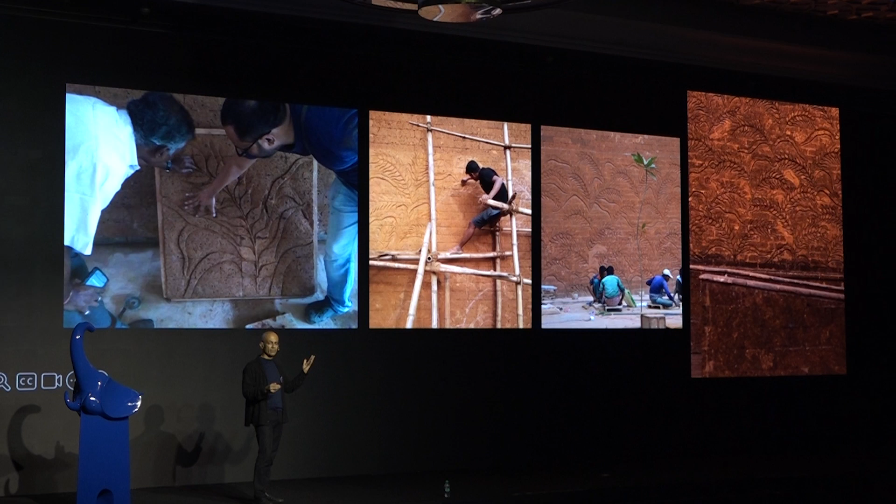They created narratives around mythology, around agriculture, all related to the theme of the land and something that would be familiar to their fellow citizens. They hand-carved at site larger-than-life crop motifs, these khondalite stone lotuses that were cast into the concrete roof slabs at the time of construction, down to the way our engineering services shafts were screened with Bastar metalwork of that region, used as screens and lighting devices, as the building signage, and how the building sits in context of the city.

And I'm going to leave you with a film that captures the experience of our artisans who worked on the project.

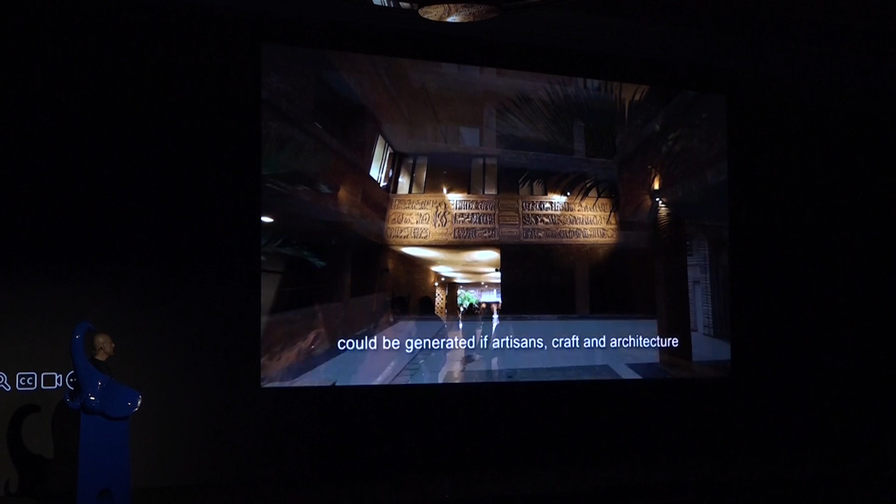We were quite excited with the quantum of work that could be generated if artisans, craft, and architecture could come together. And I think that has been a big achievement, that this building project could generate work for about 50 artisans for a continuous 6 months. We actually got artisans who had stopped working in the traditional skills, and we convinced them to come back and start working again.

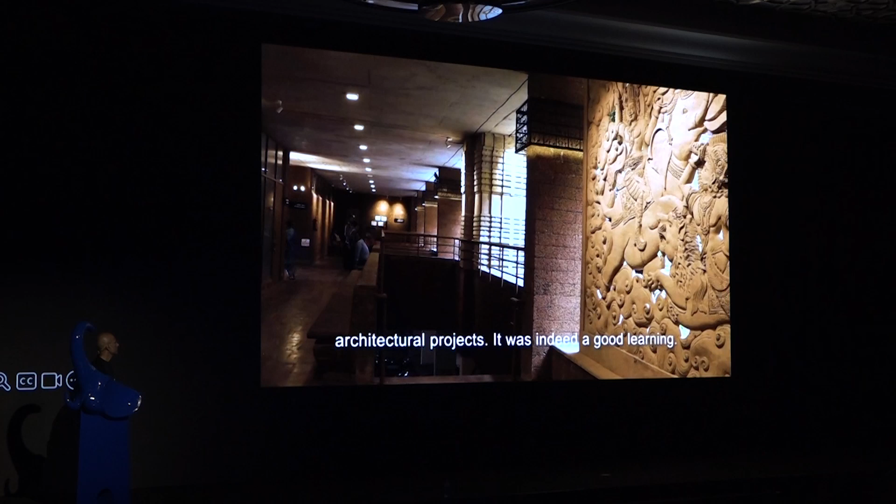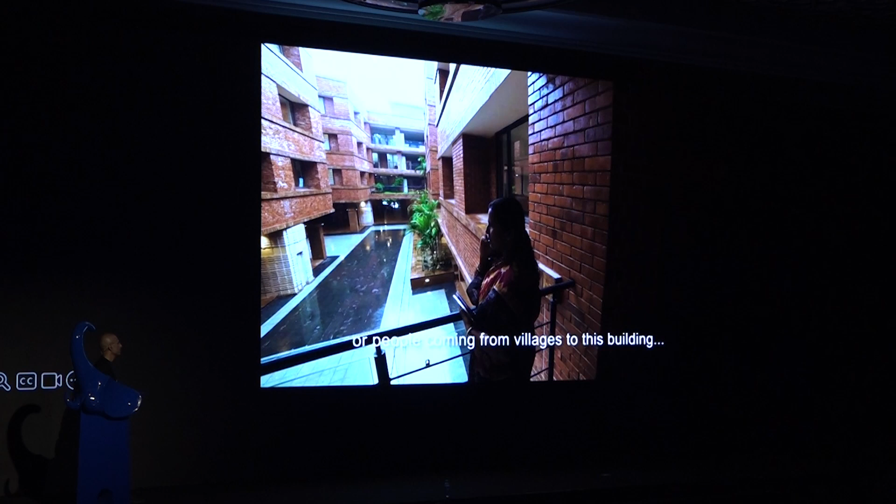It's a perfect setting for us where we could bring in artisans and craft. If you talk of farmers and people coming from villages to this building, then we want to show them something that's familiar to their environment, and that is where craft comes in.